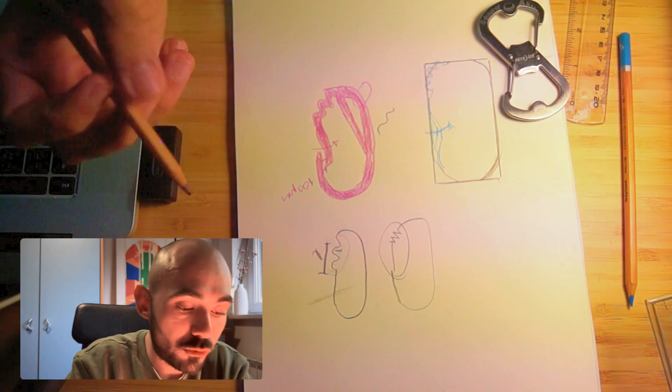One with the keyring, a second without, and then the third, maybe we can do something like a partial keyring, just to be able to put stuff inside, because then if you don't have a keyring, you can put it through here, and then it can go here.

The idea really is that this spring part is basically just to hang stuff, not to hold the main part that you want to keep inside the carabiner. I think this could be it. What I need to think about is really these dimensions, because these are basically the key of the functioning. If this is too thin, it's going to break. But if it's too thick, we're not going to be able to push it.

So yeah, that's a tricky one. Let's see, compared to this, looks like it's more or less the same dimensions. I think we should be okay. What I'm going to do now is try to move the design that I did on paper to the computer. Okay, now I have created the main body of the carabiner.

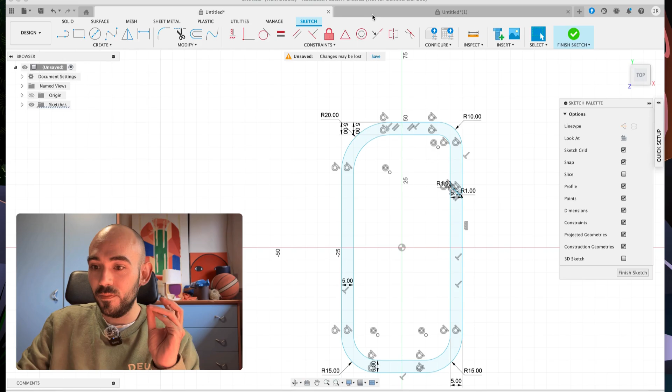You can see here. It looks a little bit better than the other one. Look. This is how it used to look. Now it has the step that I was talking about. It has this curvature that I don't like, but now it looks cleaner. It looks a lot better. It looks like it's a single piece. You can see here. Here we have this gap between these two. This is where we will have the opening mechanism.

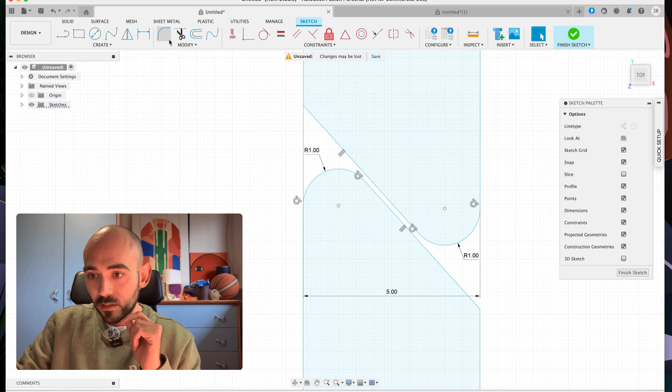And maybe I'm missing like a small radius here. I'll just put 1. And then here also maybe small radius, just so that the general feel is softer when you touch it. I don't like to have rough edges. We will see how we deal with that on the rest of the body. But now it looks good. It's looking okay. It's not perfect, but we have the shape.

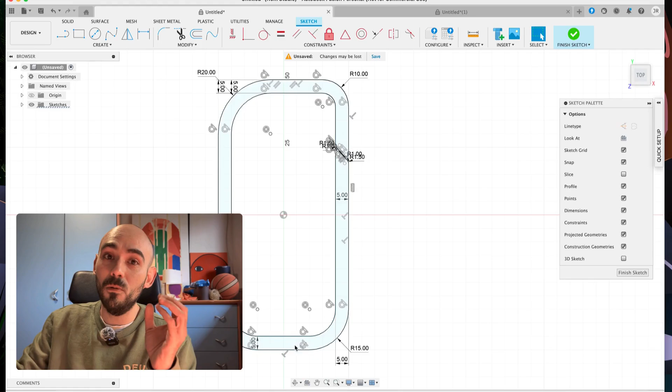Now what I need to do is work out how the hell am I going to add the spring element here and how to calculate that, because that's going to be very precise work. I need to check really well how to do it, and that's going to be tricky. So that's what I'm going to do next. Hopefully everything goes right. I'll catch up to you later.

Hey there. So as you may notice, I'm wearing different clothes, so it's a different day. Actually, it took me some time to finalize the design and do some hand calculations about the curvature that I want for the carabiner, some of the features, etc. But now it's looking good. I'm going to show you right now what I'm talking about.

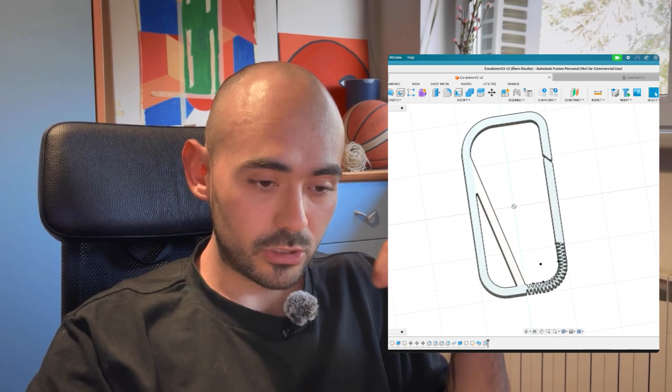Okay, so basically, this is not a final design because it's not going to be perfect on the first time. But you can see that more or less it has the same concept that I drew before. So here on the curvature, you have the spring element, which consists of a bunch of tiny, tiny radiuses, like a zigzag. What this does is that it reduces the cross section locally, so it makes these parts very compliant.

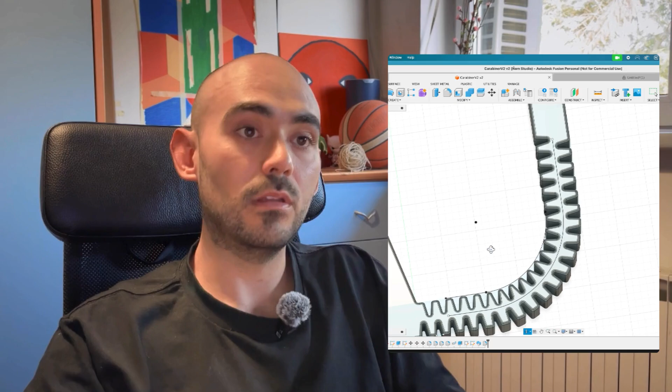There is a big problem with this design, and the problem is that it's going to generate stress concentrators due to the small vertices or the angles that we have. Those stress concentrators are part of the design because we want it to be compliant, but that can induce failure. And the only way to know for sure if this is going to survive the amount of cycles that we want is to do simulation or testing. I don't have the capability right now to do the simulation. I'm trying to install a server to be able to do the simulation myself with some open source software.

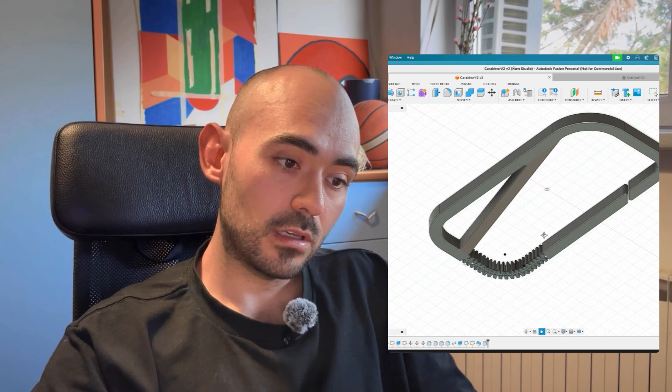But in the meantime, I already have the design. I kind of like it. I do want to add a few things. For example, if we look at this back part of the design, I want to add a texture here so that you have good grip when you're trying to press the carabiner. And also, I'm not a big fan of this gap. This gap is too small. We need to fix that.

I'm not gonna do that live. What I'm going to do now is 3D print this part, and I will show it to you on the next episode. Hopefully by then I will have done some calculations, some simulations, and see which material would work. I'm thinking about aluminum because aluminum is lighter than steel. Steel would be better for durability, but maybe we can get away with aluminum. So I will 3D print it, show it to you on the next episode, and let's see how it goes.

Thank you for listening to me. I think this video became longer than I was expecting, but I really like the first draft of the design. Let's see how many iterations I will do.